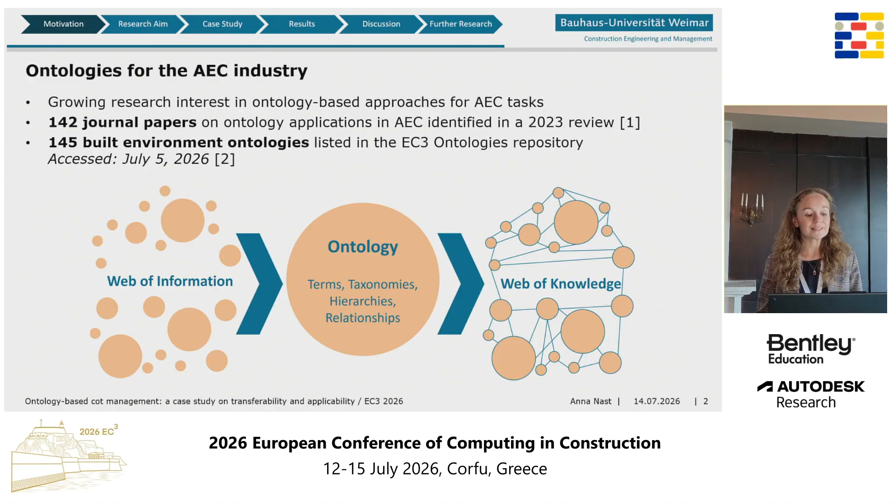There is no doubt we have a really grown research interest in ontology-based approaches for construction tasks. And maybe this contribution is a follow-up conversation about the things we discussed yesterday in the Committee for Standards and Modeling. In a review published 2023, they identified 142 journal papers on ontology applications. And the EC3 community lookup service listed 145 built environment ontologies.

However, ontologies for cost management have two main research limitations. First, they provide a static cost perspective. They have limited consideration of how cost information evolves across project phases. Second, they have limited validation scope. The validation often remains restricted to a single domain or national context, limiting transferability and scalability. In our research, we have focused on the second limitation, limited validation scope.

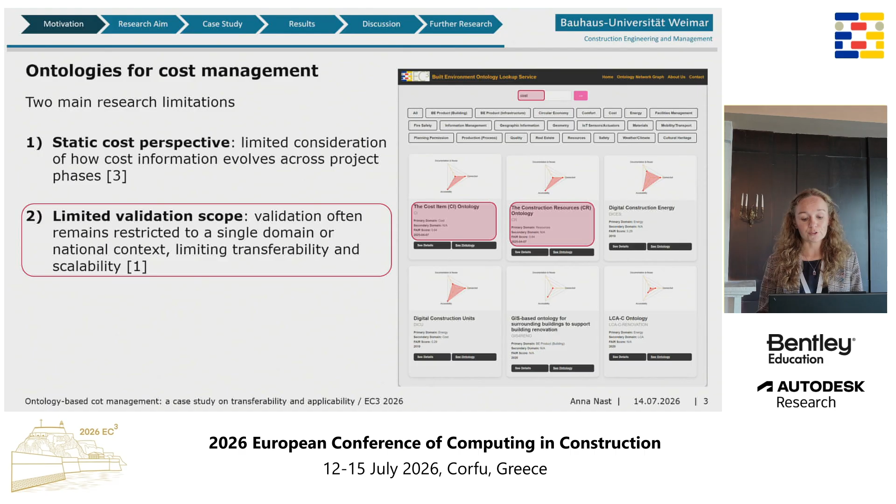The research aim is to investigate whether an ontology-based cost management approach can be transferred and applied to infrastructure projects within a different national cost management context. Let's have a quick look at our analytical focus.

Analytical focus are these four dimensions: transferability, applicability, scalability, and generalizability. Transferability means the reuse across construction domains. Applicability refers to implementing in another national context. Scalability means supporting different project sizes and work types. And generalizability means validation beyond a single case study approach.

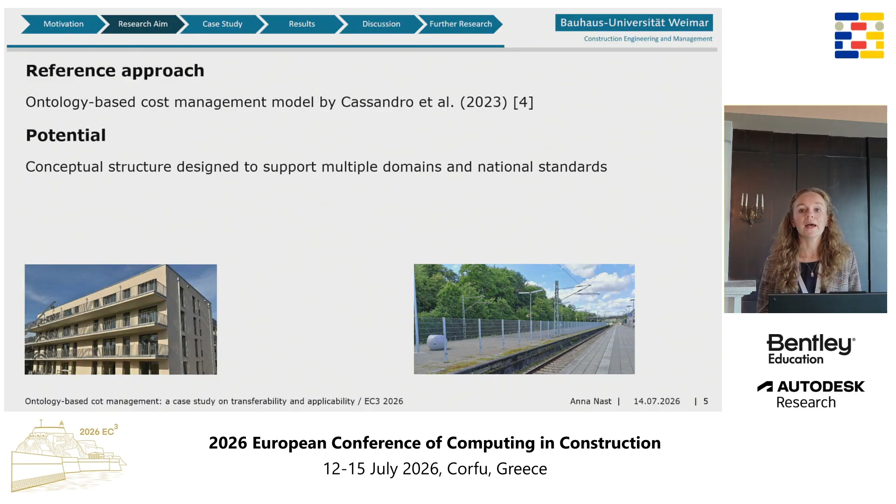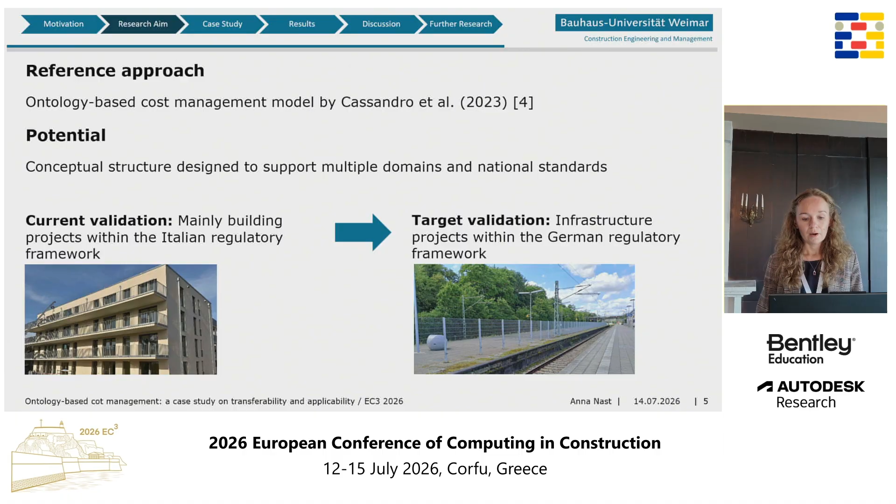Our reference approach was the ontology-based cost management model, published in Research 2023 by Jacopo Cassandro, Polytechnic of Milan, Italy. This ontology-based approach has a huge potential. Its conceptual structure is designed to support multiple domains and national standards. But current validation was mainly building projects within the Italian regulatory framework. And what we are going to do is the target validation, to transfer it to infrastructure projects within the German regulatory framework. A reference project was developed as a case study representing the typical characteristics of a small-scale railway project.

Why railways? Around 80 to 90% of railway stations are simple stations with side platforms in Germany, and I think also in other European countries, but I don't have the exact numbers. Passenger station projects were selected because they have a high degree of standardization and they have received limited attention in previous research on cost management, ontologies, and also 5D BIM.

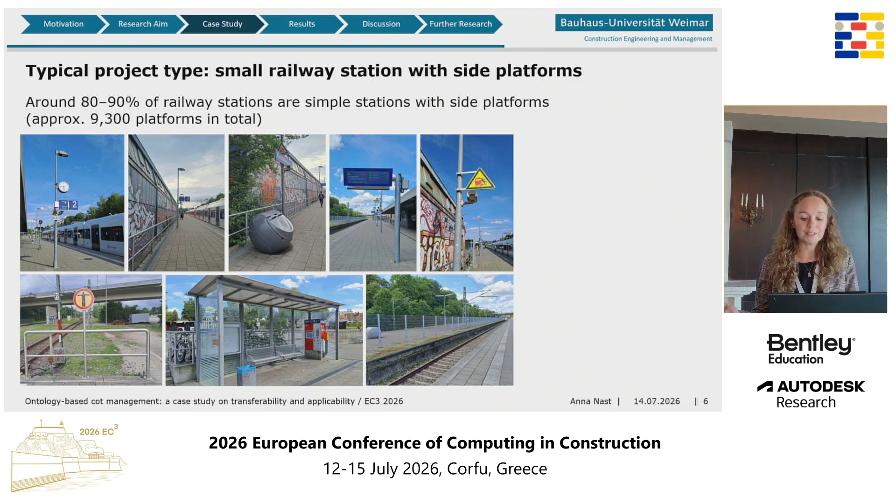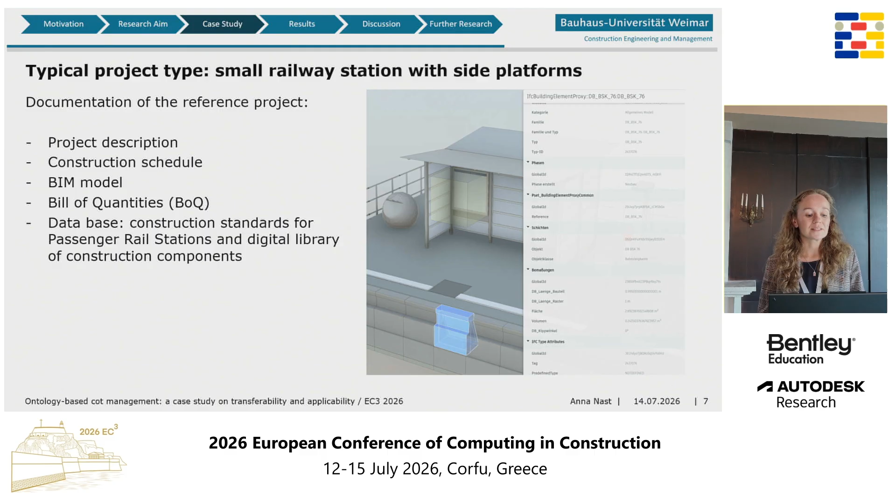A reference project includes project description, construction schedule, BIM model, bill of quantities, and is based on construction standards for passenger railway stations and a digital library of construction components. If I talk about digital library, I talk about more than 600 BIM elements and components standardized and used by different stakeholders in the project.

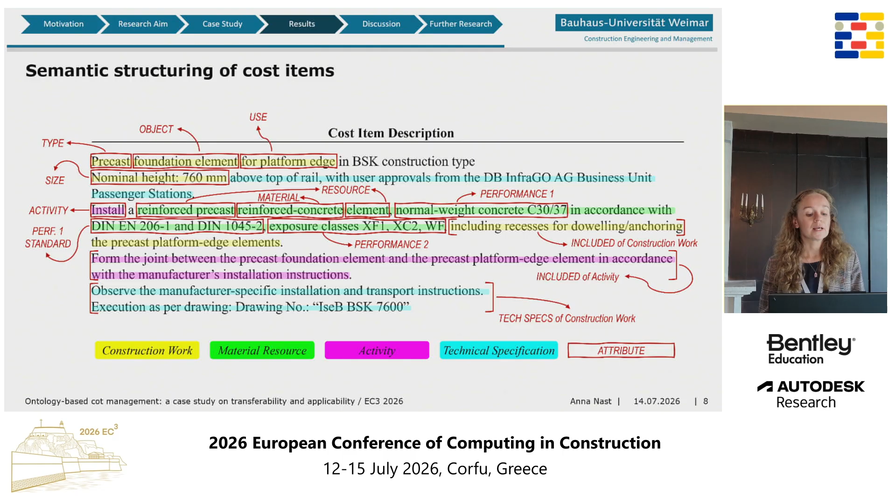The reference product was used, and we have selected some cost items for this paper because normally you have a bill of quantities with more than 100 positions, more than 100 cost items. We selected a couple of them. The selected cost items of the reference product can be decomposed into semantically well-defined components like construction work, material resource, activity, technical and performance specification.

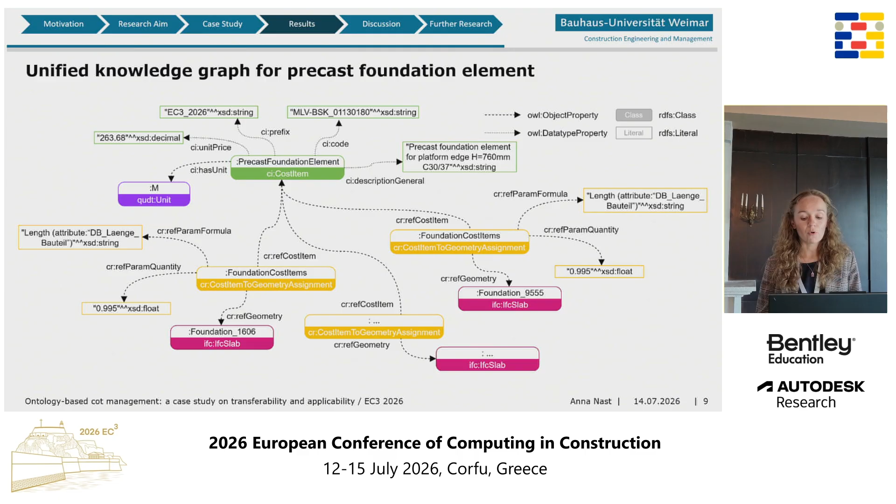This study demonstrates how existing ontologies can be reused and integrated to structure cost items and establish semantic links to geometric data. The ontologies we have used are ifcOWL ontology, cost item ontology, construction resource ontology, and also QUDT ontology for measurement. As a result, quantities, cost item definitions, and unit prices are no longer managed as separate artifacts, but are integrated into a single machine-interpretable model. Through the integration of these ontologies, a unified knowledge graph is generated in which each cost item is explicitly linked to one or more corresponding geometric objects.

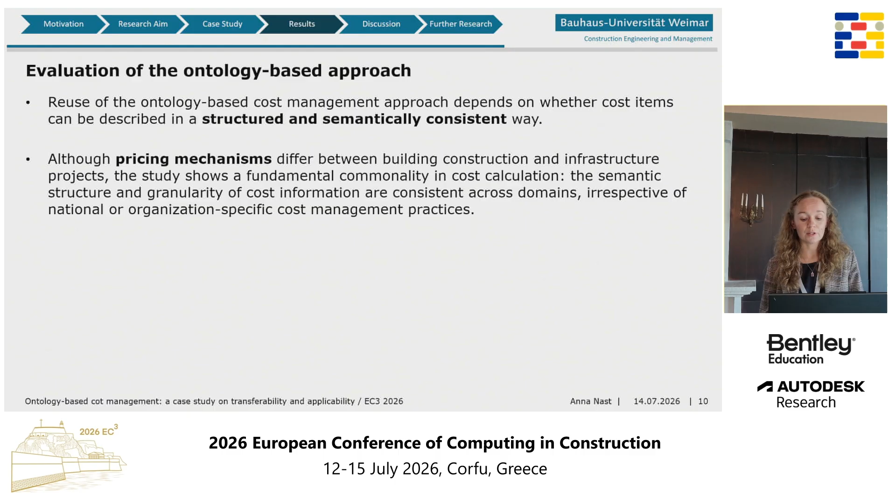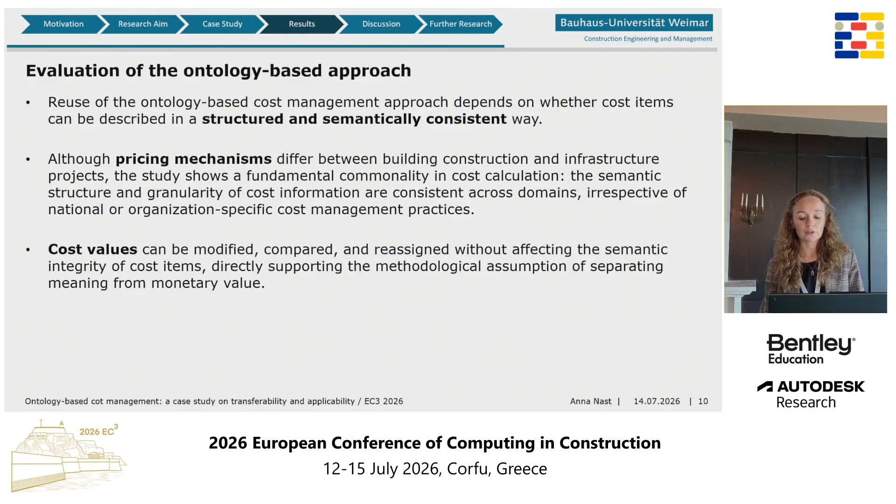So, evaluation. Reuse of the ontology-based cost management approach depends on whether cost items can be described in a structured and semantically consistent way. Although pricing mechanisms differ between building construction and infrastructure projects, the study shows a fundamental commonality in cost calculation. The semantic structure and granularity of cost information are consistent across domains, irrespective of national or organizational specific cost management practices. Cost values can be modified, compared, and reassigned without affecting the semantic integrity of cost items, directly supporting the methodological assumption of separating meaning from monetary value.

What about transferability? We have applied a cost model in both building construction and infrastructure projects, and we have seen there is no fundamental change to core ontological classes and relationships. Applicability we have shown by adapting to a different national and organizational context, the German instead of the Italian context. Scalability was supported through the selection of small-scale projects, very rare in the literature, but very relevant for industry adoption, as well as by including different construction activities.

Generalizability was achieved through the use of a reference product derived from approximately 9,300 railway station platforms. So all the railway stations, small-scale projects we have in Germany, were condensed in this reference product. What about further research?

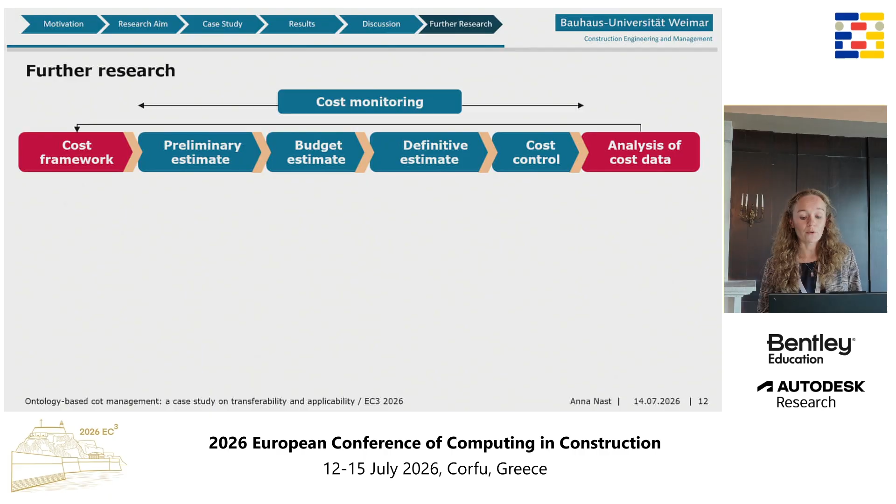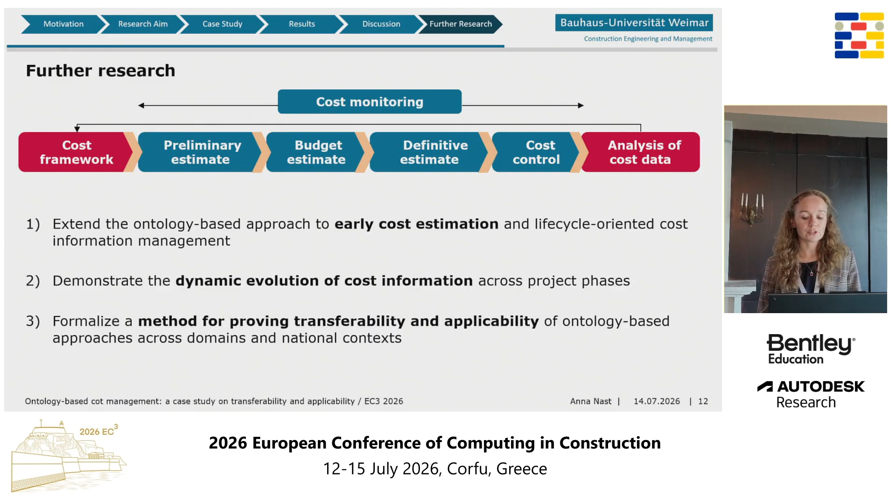Further research should address the first limitation of ontology-based approaches for cost management, namely extend the ontology-based approach to early cost estimation and demonstrate the dynamic evolution of cost information across project phases. So, you know, the first limitation I have shown you in the beginning of my presentation. Additionally, the method demonstrated in this case study can be formalized for proving transferability and applicability across domains and national contexts. Thank you very much for your attention, and I'm open for your questions.